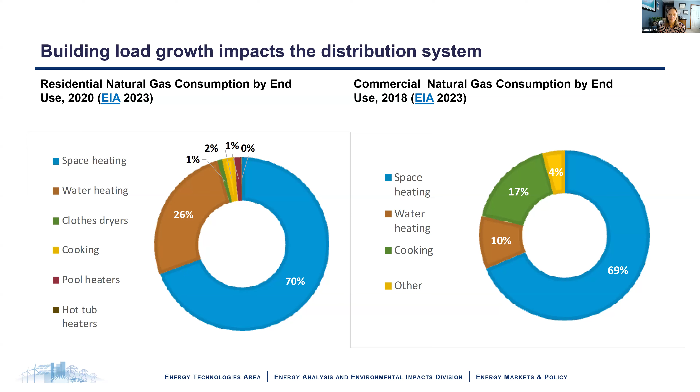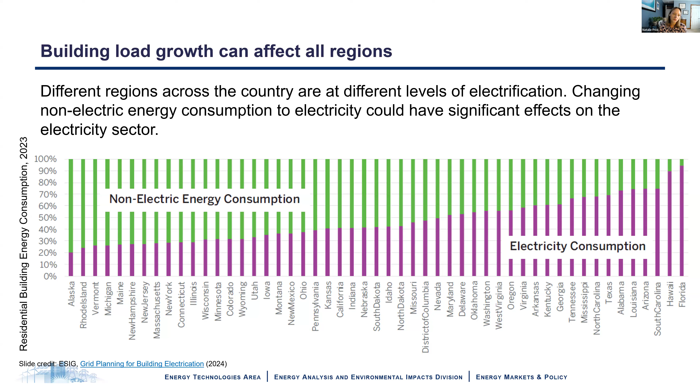Areas that are already electrified can be more efficient. So even though Texas has a lot of electric heat on their grid already, they could be more efficient, which I'll talk about in the second portion of my presentation. On the other end of the spectrum, New England states like Vermont and Rhode Island have a lot of delivered fuels for heating sources, so the impact of load growth from buildings due to electrification are going to be a lot more significant.

So the impacts of load growth are not going to be uniform across the electricity system. There's going to be pockets of it, and they're going to occur at different times of the day and year, depending on what the load growth is coming from.

For example, on the left side of the slide, this is the number of dwelling units with electric heat in Massachusetts, from an ESIG report on building electrification. This shows where load growth from building electrification would potentially be higher, in areas with more orange or more blue versus areas with less. So it's just not going to be uniform across the state, and it needs more thoughtful planning as we move forward.

On the right side of the slide is a commercial energy efficiency potential assessment from PacifiCorp's 2025 IRP. It shows different types of buildings contributing to load growth, and that load growth in buildings isn't just from switching delivered fuels or natural gas to electric heating.

It's also from different types of load growth, and it's going to occur at different times of day, even if it is for heating. For example, small office buildings will have a different saturation of electric space and water heating than a warehouse will. This means the solutions for these challenges are going to be different too, because building types differ, the way people operate in them differs, and usage schedules are different. So there are lots of opportunities to overcome this, and they're not going to be the same across the board.

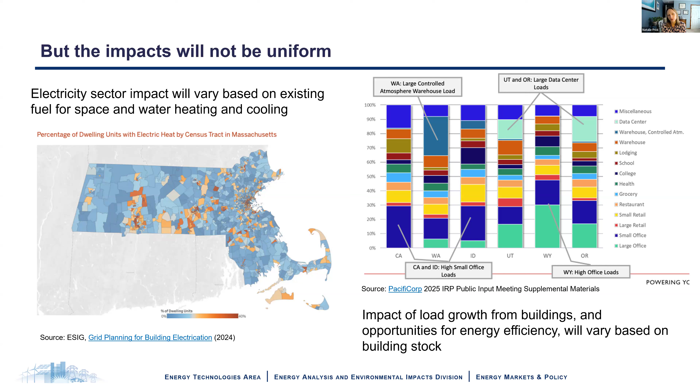So we can go on to the next slide.

I'm going to talk about a couple of the challenges with incorporating building load growth impacts into distribution system planning. These are all featured in the ESIG report linked at the bottom of this slide.

First, changing weather patterns are hard to plan for. This is particularly important as we move to electric heat, because heat pumps operate differently in extreme cold, specifically in a non-linear way. Use of heat pumps during longer and more severe winter events is going to change the shape of demand on the electricity system, and it's going to stress the system differently than when more customers are on delivered fuel or natural gas for heating.

The second thing is that electrification is happening regardless of whether policymakers want it—it's something people are choosing to do. This chart on the top left is from RMI, showing sales of heat pumps compared to gas furnaces from July 2022 to April of 2024. The blue line is heat pump sales, the orange line is gas furnace sales, and as you can see, heat pumps have been outselling gas furnaces for more than two years.

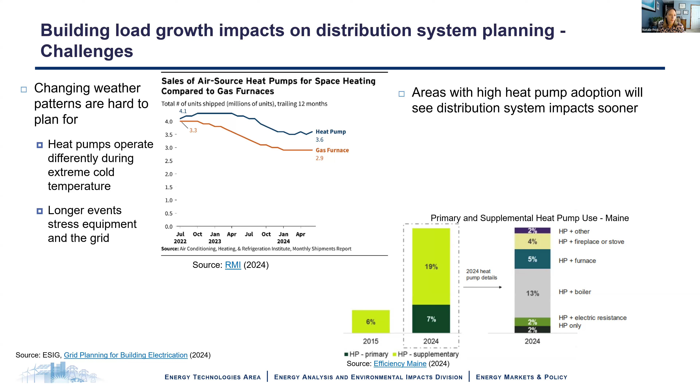I'm going to talk about some strategies to overcome those challenges. So we can go on to the next one.

Thanks. So the first strategy is improving load forecasting. Planners can expand the forecast horizon and broaden the factors being considered. Individual electrification projects may be implemented quickly, but the long lifetime of space heating and water heating equipment means the impacts of electrification are going to occur over many years.

And then when you add in the impacts of different weather—such as if people are converting from gas heat to electric heat, and at the same time you have maybe a couple of years of mild winters—it might mask the effect of the load growth on the electricity system.

Using load forecasts that capture building electrification should look beyond the typical 3 to 5 years that's considered in distribution system planning. Moving beyond that shorter time frame could be important.

Another factor is looking beyond recent trends to develop the forecast. This figure shows how historical trends and known projects make up the majority of inputs into short-term forecasts. But physics-based modeling, which simulates how power demand would change given changes to the energy-related characteristics of individual buildings, and adoption forecasts make up a larger percentage of the input factors as we look further into the future.

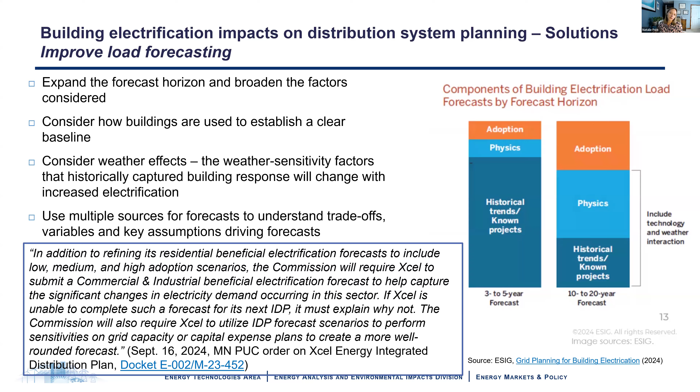We can go on to the next slide. I apologize for my distraction, I have a new dog who only acts very badly when I'm doing meetings.

Another strategy is to modernize planning approaches. Planners can reconsider some core planning assumptions, such as design conditions, like how hot or how cold it's going to be outside.

You can think about thresholds, for example how much loading a feeder the utility is comfortable with. We can consider headroom, such as understanding what an appropriate planning margin is, and also load diversity, meaning not all load is going to show up at the same time on the same day.

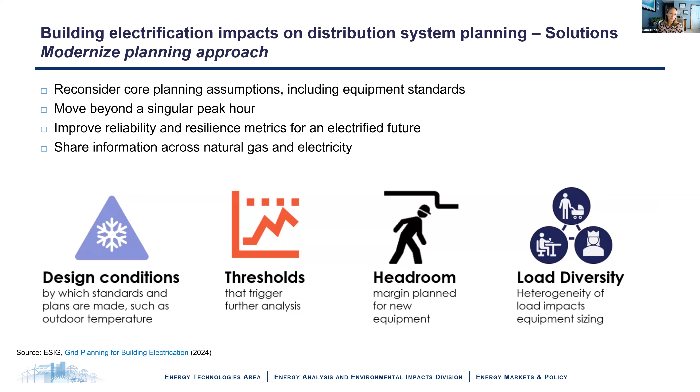In addition, planners can move beyond a single peak hour and gain a better understanding of distribution system impacts. This doesn't have to automatically mean going to an 8760 — it could just be adding representative or extreme days. I'll talk about these last two bullets in the next slide.

Planners can consider how to improve reliability and resilience metrics in distribution system planning, such as how we measure success given changing risk, and whether there are other metrics we should be considering — for example, how do we consider the impact of outages on distribution system reliability from a quality of service and human health impact?

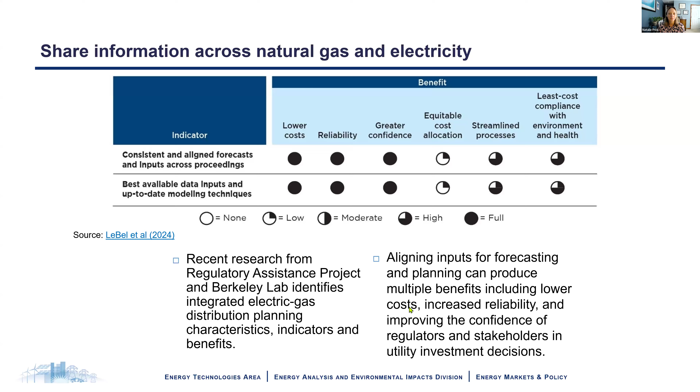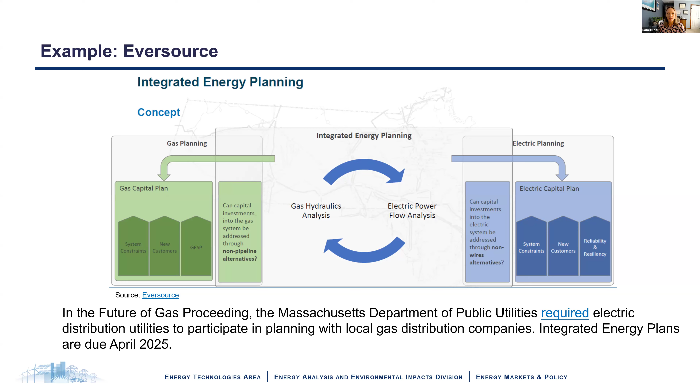I'm going to wrap up my presentation talking about strategies to reduce the impacts of load growth from buildings and electrification on the distribution system.

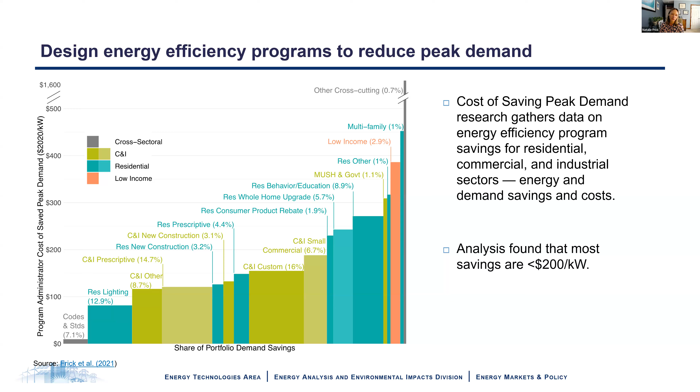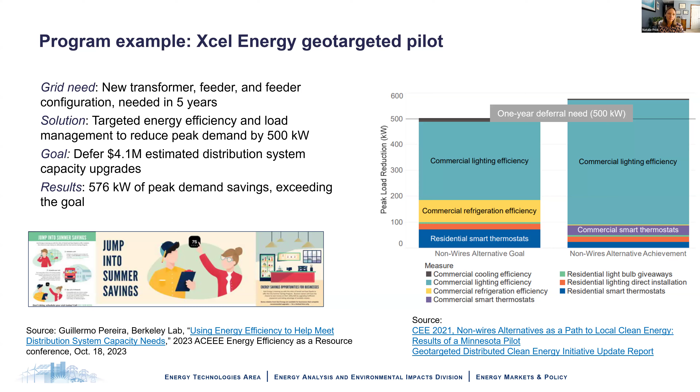For Wi-Fi thermostat programs, which are a very common program across the United States, they generally have both upfront and retention incentives. The upfront incentives being offered are typically around $100 per enrolled device. So there's lots of opportunities to develop these programs and build on lessons learned from other utilities already.

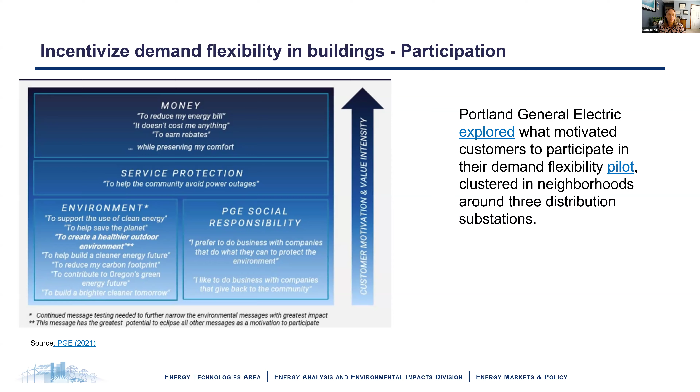Another thing that states can consider is targeted electrification, which can reduce the cost of building load growth on the distribution system. Targeted electrification strategically decommissions portions of the natural gas system at a specific geographic location.

There's also some examples from Colorado. They have a manufactured home targeted electrification project that is in its first year of winter operation right now. And then also in Massachusetts, the regulators are requiring the local gas distribution companies to deploy targeted electrification pilots, and those proposals have to be filed by next year.

In addition, there are 8 states that have enacted legislation that promote thermal energy networks, which are neighborhood scale shared networks of water pipes that can transfer heating in and out of buildings.

We can go on to the next slide. I believe this is my last one, so I'll pause and see if there's questions after this, and then I will hand it over to Andy.

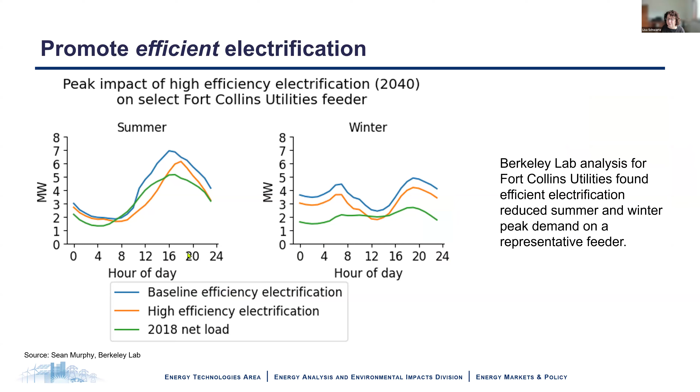Miles, I was talking with Miles about a question. I was curious about the slide 11 on the resilience and reliability metrics, which is a topic that Miles and I have been working on. We just released a report on that topic, and you put a link in the chat box.

We also have a request to show your dog. So first of all, we should do that. It is the cutest dog, a little naughty, but like 5.5 months old, laying down and being so calm and chill now that I'm done presenting, but he ate a plant and ate the trash while I was presenting. So I apologize for my distractions, but I'm gonna show him because I love doing it.

It's a big dog, look at that. His name is Ziggy. He's a retriever pit bull mix, and he's 5 months old and kind of a pain. But anyway, I apologize for all of my distractions. Yeah, Ziggy Stardust, truly a star.

I did have a few thoughts. Berkeley Lab has an ICE calculator tool that measures customer interruption costs using a collection of customer interruption cost surveys, and it will be interesting to see as we do an update of the tool with new survey data what the impacts to the cost of customer interruptions are as more electrification occurs, and they may have larger impacts on customers, whether customers are reporting in those surveys that interruptions, or they're willing to pay more to avoid an interruption, and thus investments in resilience to extreme weather may actually grow higher and higher, and we may be more willing to do that.

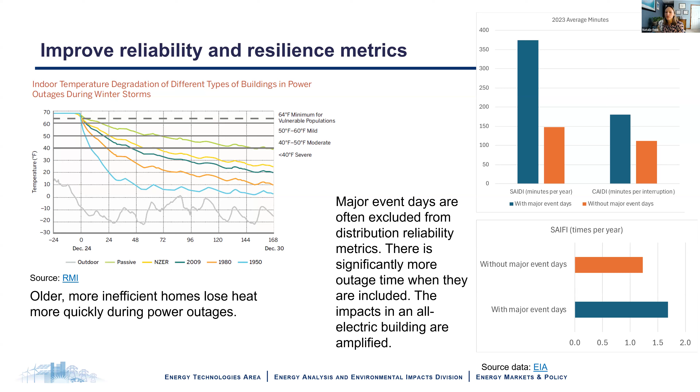It's the slide about the different ways that they looked at what motivated consumers. And so you remember the smart grid testbed had like, I don't know, it was per very high KW or something. And I don't have it listed on the slide, but...

It was based—they were offering customers this incentive and then also offering them other options for how they could use their savings. They could donate it to a charity. They asked a lot of questions about what motivated people to participate and what they wanted to do with the savings that they were acquiring. And it was in geographic locations that were part of more or less a non-wires alternative project.

And so let me see if I answered the question. Three substations, with different composition of customers. And this was truly a pilot where they were actually accruing savings to put off any potential expensive upgrades on a substation. At the same time, like Natalie said, they're also trying to understand for the future, what's the motivating factor? Is it money? Is it helping the community? Is it reducing reliability issues? So it's a really interesting pilot, but it was a very high per kilowatt hour number for savings.

I can put a link in the chat later to a better resource for that. Anything else before we go to Andy?

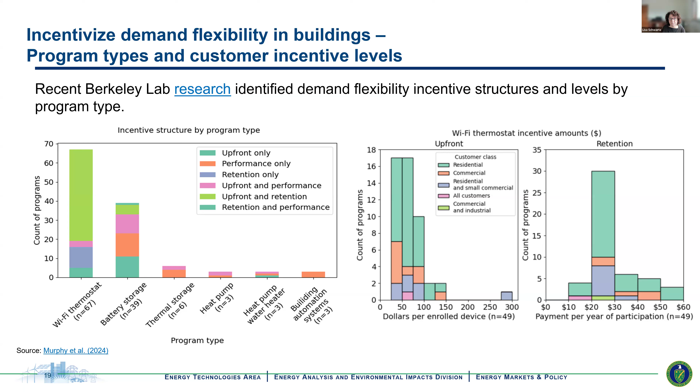I'm going to pick up a little bit where Natalie left off and talk more specifically about the value of efficiency and demand flexibility in future grids with load growth, especially in the building sector. Then I'll tie some of that into a discussion about how that value flows into customer bills and rate design around building technology electrification.

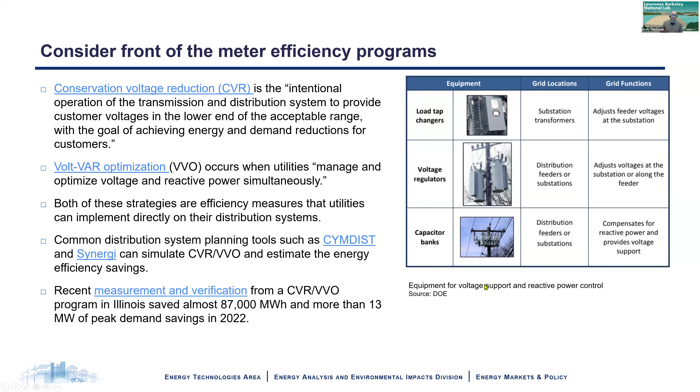I want to talk about the bulk power system for a moment, because it's a good launching point when we start to put numbers to the value of efficiency and demand flexibility. This comes from a study we did a little over a year ago, looking at the costs to the bulk power system: new generation and transmission capacity, fuel, and variable operations and maintenance expenses on the grid, and what those costs look like in futures with varying levels of load growth from the building sector, particularly through electrification technology.

As a starting place, we found that very inefficient electrification—think electric resistance space and water heating—added a pretty significant load to the grid. As a result, the modeling showed we needed to build a lot of new generation supply, requiring high capital costs and transmission investment. A lot of this is also about what the grid of the future looks like, especially with this inefficient electrification.

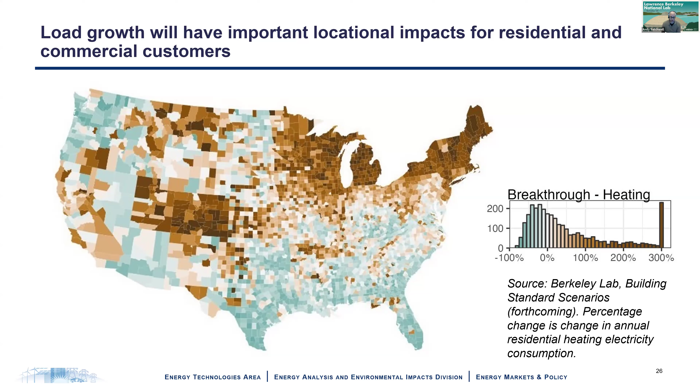So go to the next slide—what's the role of efficiency and flexibility? Going back to that bulk power system study, two examples highlight the opportunities to use efficiency and flexibility to help mitigate some of the impacts I was talking about.

The first example is Texas, modeled in 2050, looking at a summer peak day—a summer peaking system. We find that using heat pumps, which have a higher energy conversion rate and are thus more energy efficient than electric resistance heating and cooling options, can generally reduce the peak impacts from new demand load growth compared to inefficient electrification.

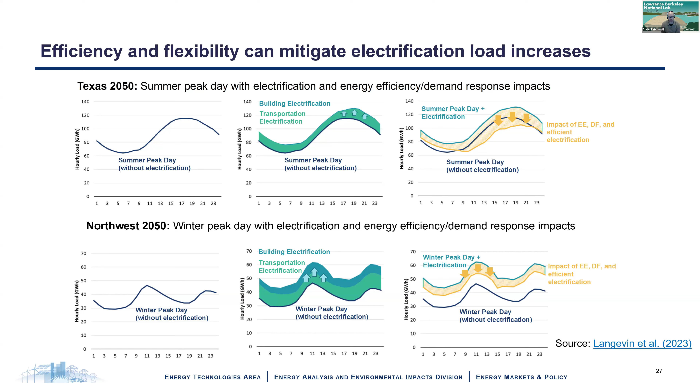So we shift that curve down in the summer. In the Northwest, an example of inefficient electrification with a lot of electric resistance heating and water heating, you get pretty significant peaks in the winter. What happens is you can reduce that peak significantly through heat pump deployment as well as demand flexibility, things like thermostat control programs that reduce set point temperatures, and other strategies like shifting broader loads in the residential home. So you can affect these peaks simply through using more efficient heat pumps as well as implementing demand flexibility strategies.

So what does this mean on a dollar basis? Going back to those staggering increases in bulk power system costs, when you assume more efficient heat pump deployment and greater demand flexibility, you can reduce these fixed and variable power system costs by a significant amount. With the most aggressive deployment of renewable supply combined with efficient electrification building technologies, you can reduce almost a third of those costs, a little over $100 billion a year, simply through efficiency and demand flexibility. This is particularly true for power systems with more aggressive load growth and state goals related to renewable and clean energy sources, because those are so capital cost intensive.

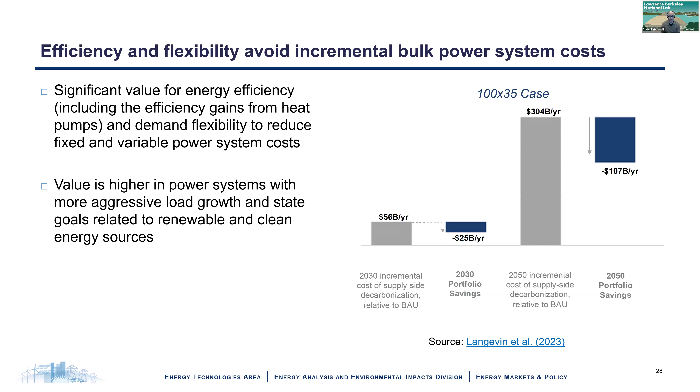So what you can take away from these results is that winter peaks are particularly important when we talk about load growth in the building sector from electrification. Also think about the value of efficiency and flexibility in systems that are pretty constrained, that can't transport electricity and share it across large areas. So there's a significant opportunity there as well.

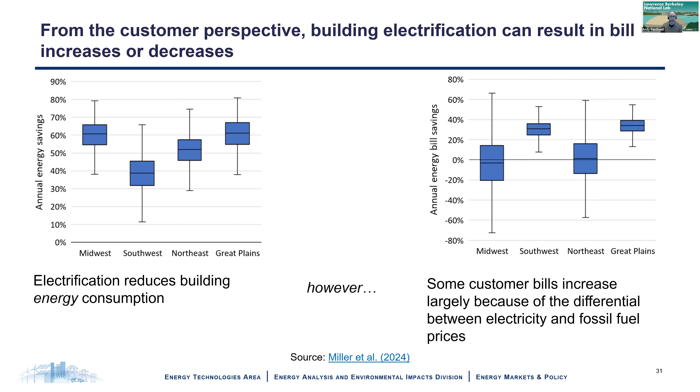So this is the launching point to think about how we can possibly mitigate these bill impacts, thinking about it through retail electricity rates. Let's go to the next slide.

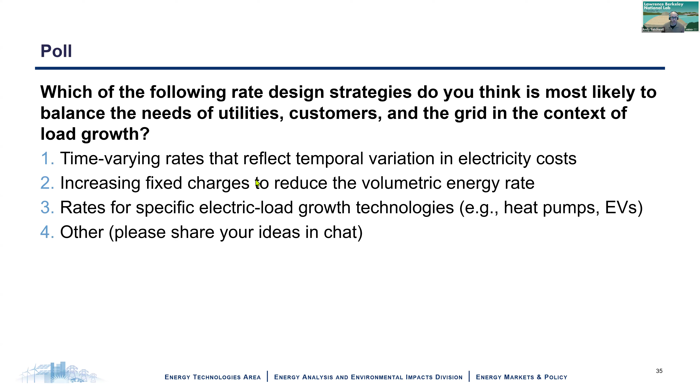So with that, let's go to the next slide, which I think is actually my last slide. These are just some concluding thoughts here about customer bills, and how what drives customer bills, as I've talked about so far, may have implications for how you design and implement building electrification programs. I think it's a no-brainer: buildings in locations with low electricity rates, electrification makes a lot of sense.

And we tend to see that as well just in practice, in the Southeast that tends to have low electricity rates and homes with a lot of underlying electric resistance technologies, there's a lot of heat pump deployment, for example. And certainly targeting marketing to customers with those electric resistance technologies can be pretty straightforward, because those are the customers who are more likely to experience bill savings and favorable payback times on their investments.

But it is those customers with fossil fuel baseline technologies, like natural gas heating or water heating, that may need some additional education, or customers without pre-existing space cooling. So when you install a heat pump, you get air conditioning, which is great for comfort, but it also adds a new load for customers, which can increase their bills. And so educating those customers in particular about the potential financial costs, but also the health and comfort benefits of electrification, can be a possible design and implementation consideration.

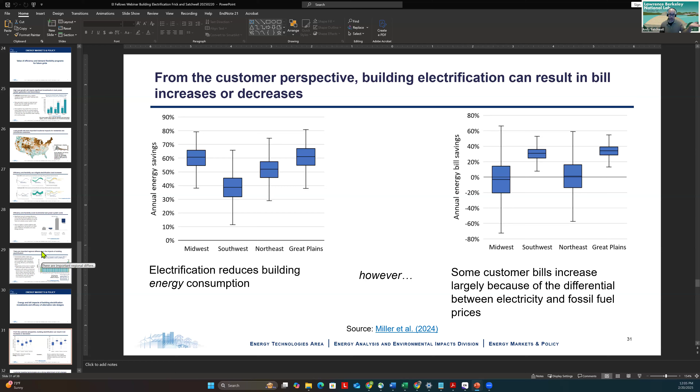Yeah, no, it's a great question, Nate. Specifically in the study, our Northeast utility that we were modeling had very high fuel oil, as I'm sure you're aware, and a little bit of propane in the underlying fuel mix. I think utilities, from the customer perspective, certainly it's customers that have a fossil fuel—whether natural gas, fuel oil, or propane—as the existing baseline technology. I do think other utilities should also be aware of these issues, because they're going to switch from summer to winter peaks, or at least the winter peaks are going to be noticeable and need to be thought about from an operational perspective. And that is happening even outside places that have a large amount of fossil-based heating to begin with.

And so I think those are kind of the two pieces of it, but certainly the utilities with a lot of fossil fuel baseline technology are the ones that I think are going to need to consider the customer education component in program design and implementation, and think through some additional programs and incentives beyond just retail rate design. I don't know if rate design will get us far enough to make the economics make sense for a lot of customers there.

Thanks, Andy, I appreciate that. Yeah, and Nate, after this I'll put some links in the chat to the dual fuel heat pump rate programs for load flexibility that I found. Great, thank you. I think I've read the Otter Tail one, is that what it is? I haven't seen the other one, so that'd be great.

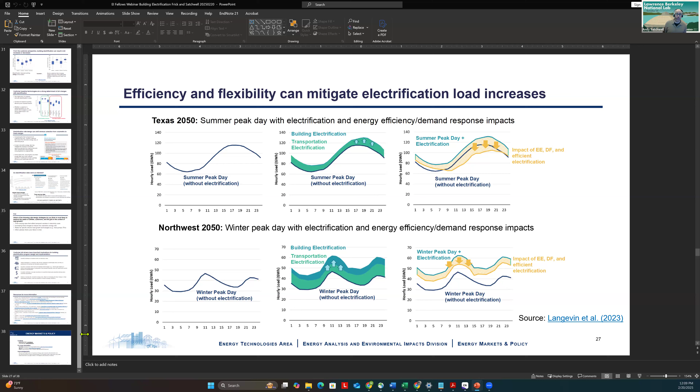Yeah, boy, we could probably go for hours talking about this question. There's some good literature out there on low income customer response to time varying rates. I'll put a link to one meta study we did here at the lab in the chat shortly. Some of it's very empirical and some of it's very anecdotal. I asked the question: are there technologies that can help customers respond regardless of their structural situation, whether they're working multiple jobs, their tendency to be home or not, or their home building setup? Smart thermostats are available, inexpensive, you can program them. There are other technologies, Amazon Home or the Alexa stuff. There are ways to use inexpensive technologies to help control usage even during peak periods. So it's a great question, not fully settled for sure.

Tamara, do you know if electrification for buildings was much of the discussion? I think that's a piece of it, because there is beneficial electrification the utilities have to be doing as well. And so they found that because of the cold climate, like what was mentioned before with gas prices versus electric prices, when you switch a household to a heat pump it often raises their bills, which is another equity concern in terms of those customers being left on the gas system.

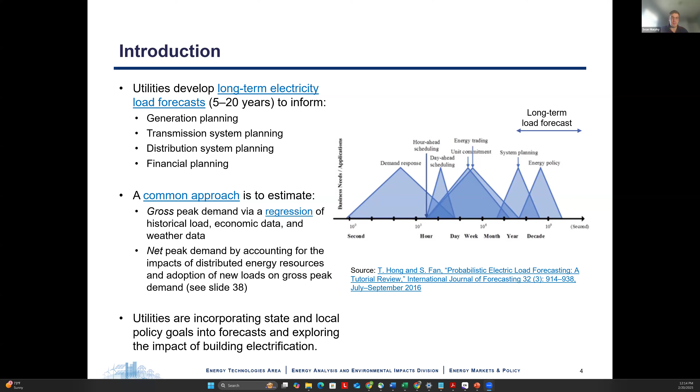The framework that we developed responds to this interest in building electrification. So for each step in the framework, we provide some guiding questions and identify key modeling decisions and considerations, and provide examples from technical assistance that we provided to 2 municipal utilities: the Sacramento Municipal Utility District, or SMUD, which is in Northern California, and Fort Collins Utilities in Colorado.

It's important to note that our approach is not the only way to develop a load forecast that accounts for building electrification. It reflects the lessons learned from our technical assistance and the data that we had available, and in particular focuses on how to use these publicly available end-use load shapes and load forecasts.

I'll get into that in a little bit because there's a data resource out there that we leverage for this that can be really useful for your purposes, and for any utility that's developing a load forecast, that I want to increase your awareness of. Next slide.

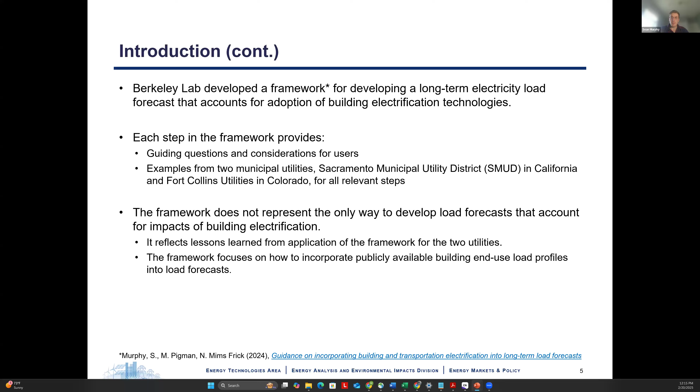Next, the framework shows how to choose key inputs on technology selection and adoption before making the actual estimates of the changes in load due to building electrification. And finally, the framework provides examples of how to apply the forecast and actually analyze different planning problems that you might be facing.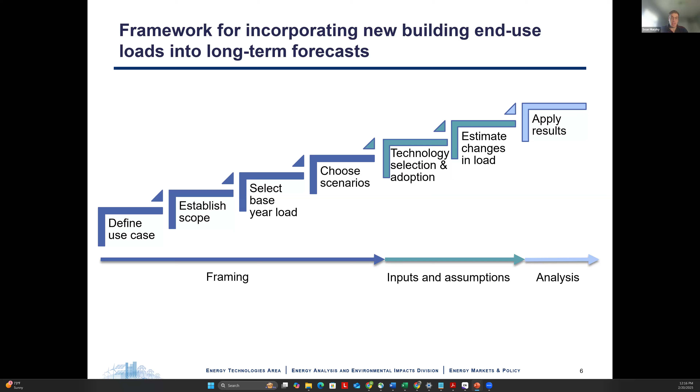Next slide, you can move to the next one. I'll now be walking through each of the framework steps and providing some examples. So the first is defining the use case.

It's important to ask at the onset what planning activities you're trying to inform, be it generation, transmission, distribution, or financial planning. The decisions made on the forecast scope, and the scenarios and analyses that you conduct with the forecast, are all downstream of this decision on what the use case is.

So in the next slide, I'll provide some examples of how we addressed this with our collaborating utilities.

The utilities we provided technical assistance to had some different goals in mind. Fort Collins Utilities was interested in the impacts of building electrification on its distribution system, and in particular, whether their feeders may require some upgrades. If you're adding a lot more load, that can put some strain on the physical distribution system and may require some upgrades.

They're also interested in understanding how energy efficiency may be able to mitigate those impacts. SMUD, on the other hand, was interested in the system-wide impacts of building electrification to inform their integrated resource planning process, as well as efficiency program design. So slight differences in the focus here. Fort Collins is more on the distribution system, and SMUD was system-wide, and that had some impacts on the decisions that we made in the next steps of the forecast.

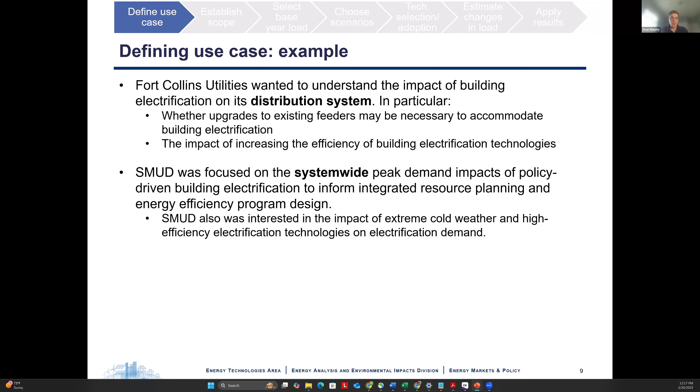Once a use case is defined, the next step is to establish the scope of the forecast in terms of the physical part of the power system that you're concerned with, the customer segments that are relevant - so that's residential versus commercial and industrial - and then the time frame that you're concerned with. Each of these should be consistent with the use case and internally consistent. If you're focused on residential feeders, then you don't need to think as much about industrial load growth.

As I mentioned earlier, long-term load forecasts can be from 5 to 20 years. The further out in time, the more uncertainty there is, but understanding what might happen in 20 years can be really important for decisions in the near term. The lead time for getting a new substation may be 5 years, so it's useful to know if you're going to need one, say, even in 10.

To select a time frame, some things to consider include what policies you're trying to account for, whether there is a requirement to analyze load over a particular time frame due to statutory requirements, and whether you're looking out far enough to see the expected market-based or policy-based impacts of electrification. So if you're expecting a lot of adoption of EVs in 10 years, your 5-year forecast isn't going to shine a lot of light on the issues you're trying to solve. It's helpful to have a time frame that includes the periods in which you think these changes are going to occur.

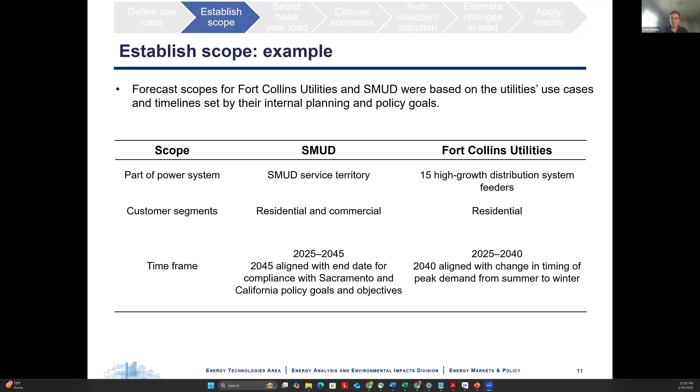I'd mentioned this term earlier of a base year load. Often utilities use that regression approach, looking at historical weather, economic, and load data, using that to understand how peak demand depends on the economy and weather, and then extrapolating that into the future. That's a pretty common way to set a foundation for your forecast and then make adjustments from there.

We ended up taking a slightly different approach that had to do with the data we had access to, and we were really interested in understanding what an hourly load forecast would look like. So we wanted to do more than just the single hour of peak demand. What we looked for was we started with an entire year's worth of load from the utility. We took the meter data from the utility and said that this is the foundation for our forecast, and then built on top of that in terms of adding the electrified loads.

There are different ways you could go about that. If you have a single year of load, that's going to carry with it the specific weather, economic, and events that occurred in that year. If you took multiple years of load and averaged them out, things average out a bit. And then you can also have an econometric way of estimating load by taking all these different variables and trying to project a relationship out in time.

One of the key inputs here is that we needed access to 15-minute or hourly gross metering data, and also having the PV generation data is really helpful, because sometimes if you just have the net load shape from a utility, you need to add back the PV generation to understand what demand was at the building level.

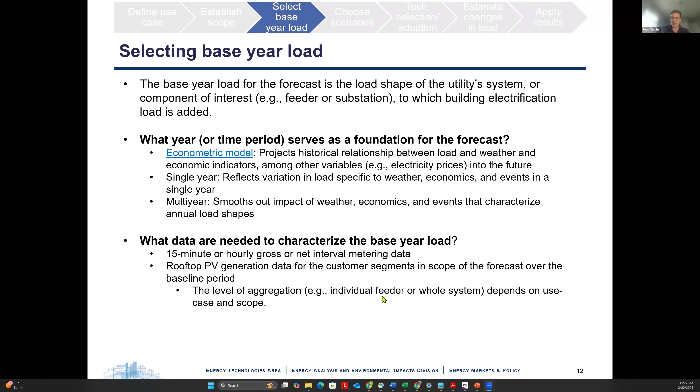So as I mentioned, we had to make some decisions based on the data that we had. I'll be talking about this database of end-use load profiles—basically, what does an hourly load shape for a heat pump electric water heater look like? There's a database we use to provide those for our forecasting, and those were all based in 2018.

We had to use 2018 load as our foundation when we worked for both SMUD and Fort Collins. For SMUD, we aggregated everything by customer class, because we knew there were differences between residential and commercial customers when it came to electrification. For Fort Collins, we aggregated customer-level load at the level of 15 different feeders, so we had 15 different load shapes, meaning 15 different forecasts.

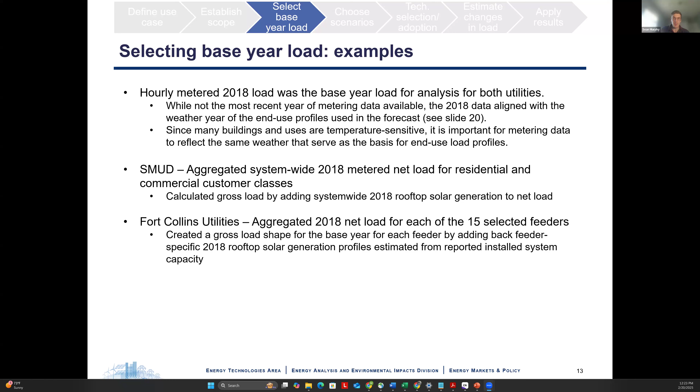Next slide. So, choosing scenarios. In any aspect of utility planning, scenarios help you explore a range of possible futures and get a handle on the range of outcomes that could occur from different drivers of uncertainty.

You can't explore everything with every possible scenario, or understand the load forecast under every condition that could happen in the next 20 years. So selecting scenarios is important for setting bounds on the complexity of your analysis, so you're building scenarios around the key things you think will affect building electrification.

In particular, you can select scenarios on building electrification related to technology adoption levels—say, what share of homes do you expect to have heat pumps in 2030 versus 2040. Then there's technology operations, which can include the efficiency of the technology, since whether you're installing an electric resistance water heater or a heat pump water heater can have a big impact on the load you'd expect in a forecast.

To construct these scenarios, you consider different policies affecting building electrification, as well as expected market changes that affect adoption. You can relate scenarios to the end date of a policy and work backwards: if everyone has to start buying a heat pump water heater by 2035, what does that mean for adoption in the following years?

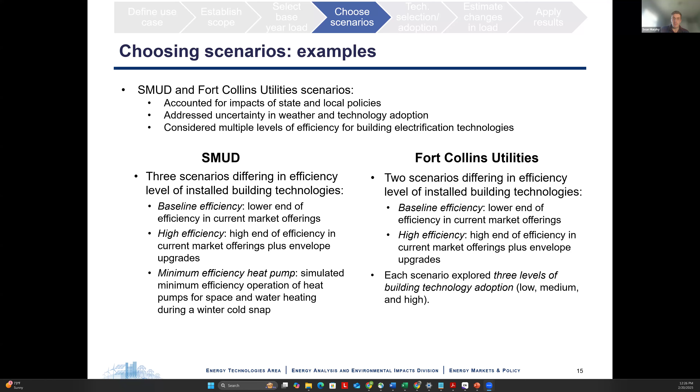Next is the selection of technologies to include in the forecast. You can think of this in two steps: first, what are the end uses—water heating, space heating, cooking—that you expect to electrify? Then, what are the particular technologies you'd select?

So if you're expecting space and water heating, it's important to include those. But if you're not expecting a lot of people to electrify their dryers, you may not include that in the forecast.

When it comes to technology selection, you make decisions between, say, an electric resistance water heater and a heat pump water heater, since those can have significant impacts. Again, you can align these decisions with existing policies. Building codes may set a minimum efficiency level, but you also may need to make judgment calls on what you expect people to adopt in the future. For example, do you expect people to fully electrify space heating even in a cold region, or do you expect them to retain gas or oil heat in the Northeast, with the heat pump just as a supplementary heat source? Those decisions can have a big impact on peak demand estimates and are important to be explicit about in developing your forecast assumptions.

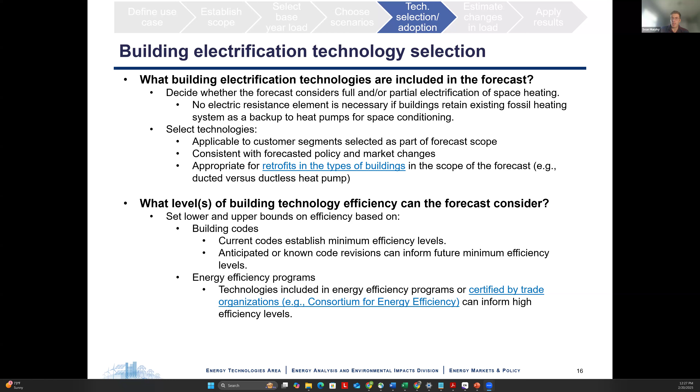The decisions you can make in selecting these technologies include the different SEER or HSPF ratings, which are efficiency metrics for heat pumps, and the different levels or locations of envelope insulation in the building. All of these things can impact the loads, and this is the level of granularity you can get to in developing assumptions on technology selection for load forecasts.

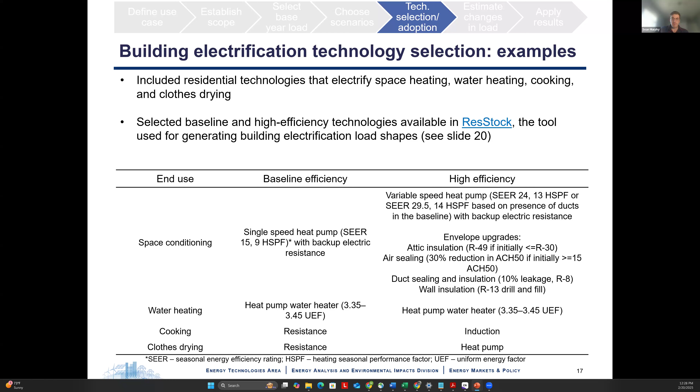The next thing I want to talk about is selecting the level of technology adoption in different years of the forecast. It's really important to first know what the current level of adoption is—do you have any heat pumps in your area? Then you can determine what's driving adoption and estimate how it changes over time. Policies and consumer preferences may be the drivers here. You'll never have perfect foresight, but you can make informed assessments by considering what adoption is compliant with relevant policies and trying to understand the market dynamics and how people are starting to adopt these things.

You might be able to leverage existing estimates of technology adoption—there are researchers who've made efforts on this, and we have some resources at the end of this presentation linking to those. Alternatively, you can try to model tech adoption using different stock turnover or diffusion models; we provide links there as well. There are existing methods for estimating adoption over time that you could leverage in a more bottom-up way, similar to what utilities might use in their forecasts.

We'll also add that knowing adoption at a utility-wide or state level is useful for a forecast, but we expect adoption of electrification technologies to vary geographically. Some people are more likely to adopt than others, and some are more able to adopt these technologies than others. There are methods to relate socioeconomic factors of adoption and use those to understand which pockets of a utility's jurisdiction may be more likely to have heat pumps in the short run.

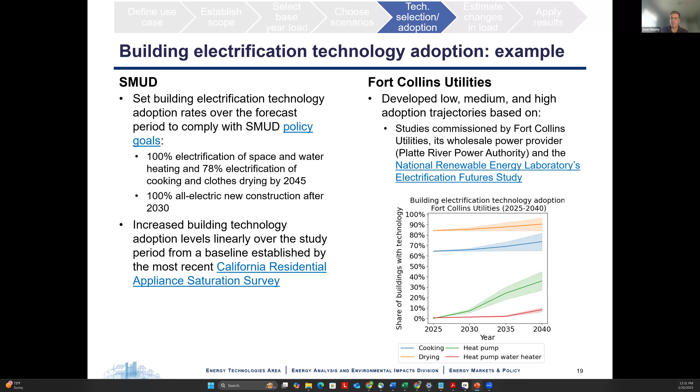So far we've covered selecting the technologies and their adoption over time. Now I want to talk about how these two things come together to produce estimates of building electrification. At a high level, imagine you have a load shape for a heat pump, and you want to scale that up—if everyone in an area adopts them, you can just multiply those two together. But in reality, not all buildings are the same, and people don't always use technologies at the same times and intensities. So a forecast that assumes a single prototypical heat pump or electric dryer isn't really reflecting the variation we know exists.

We address this challenge by using models called ResStock and ComStock, developed by the National Renewable Energy Lab. They provide end-use load profiles for representative buildings of the US building stock, both as they were and what we expect them to be under electrification. These are really powerful tools we've used across a number of our projects, and they've been used by utilities in their load forecasts, since you can directly download and incorporate them into your processes.

There's a lot of detail on all of this, and I'm not going to go into all of it. We do have a companion report for anyone interested in the nitty gritty. So for now, I'll move on to the next step, once you have those load profiles.

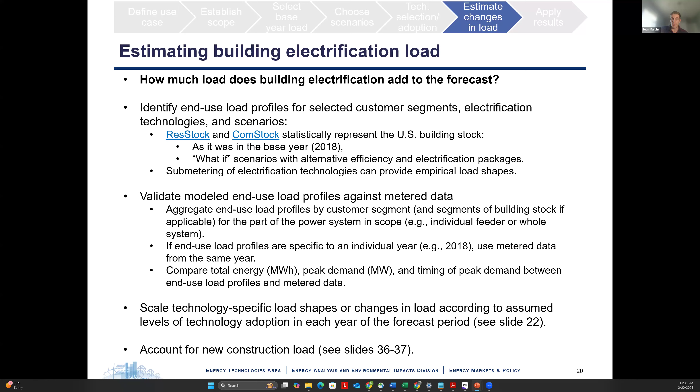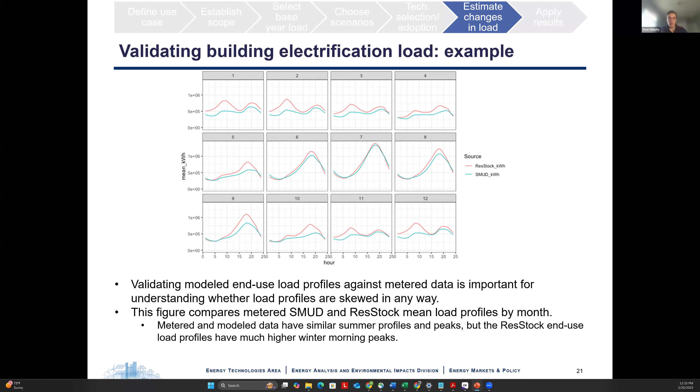Once you have those load profiles, the first thing you want to do is check how closely they align—how well they represent demand as we know it. So we compared the modeled load from ResStock, shown in orange, to the actual meter demand in SMUD's territory, shown in green, to see how well it represents reality. What we find is that it's pretty good at representing demand in the summer, seen in section 7, but in other parts of the year it's not as accurate. So we had to adapt and find a way of using these that didn't carry some of these biases.

The way we approached this was by taking the end-use load profile models for the baseline condition—what buildings in America look like right now—and what they'll look like once electrified, then calculating the difference between them, and using that difference in the forecast rather than the direct output from modeling. This is one of the most methodologically dense parts of our project, so I won't go into the depths of it, but it's important to interrogate the data sources you're using and understand whether these building load models reflect building load in the areas where you live.

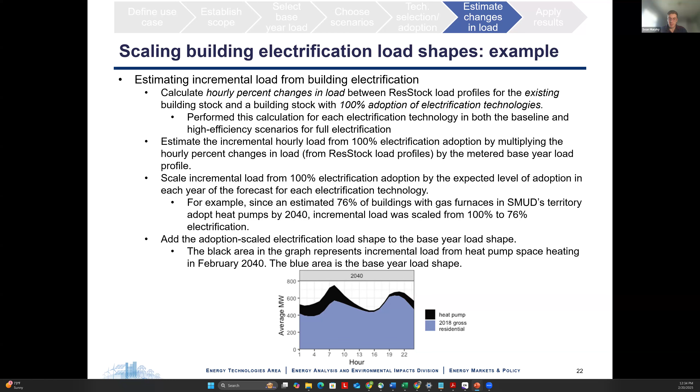This is the last section of the presentation, where we show how we applied some of the results of our forecast. This is the most interesting part, because at this point we've made all the methodological decisions about how you build a forecast—now we get to apply it to the planning questions we're concerned with.

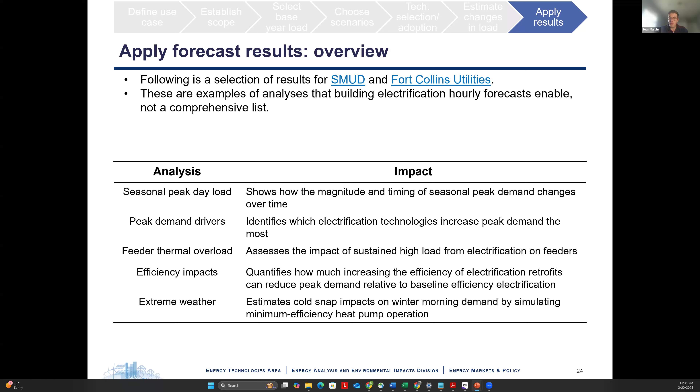When we do this, we're able to understand a couple of really interesting things. First, we can see how the magnitude of peak demand changes over time with our forecast. Then we can also see how the timing of peak demand changes.

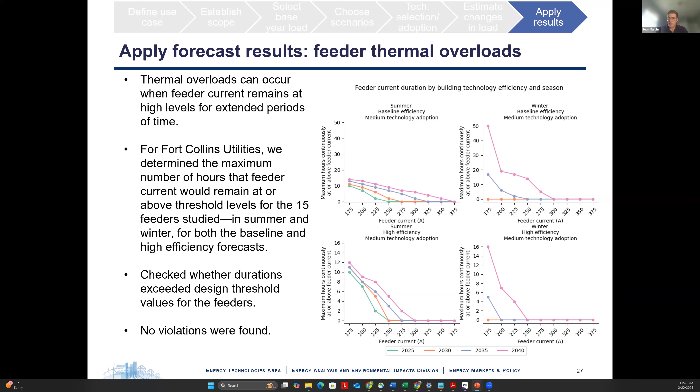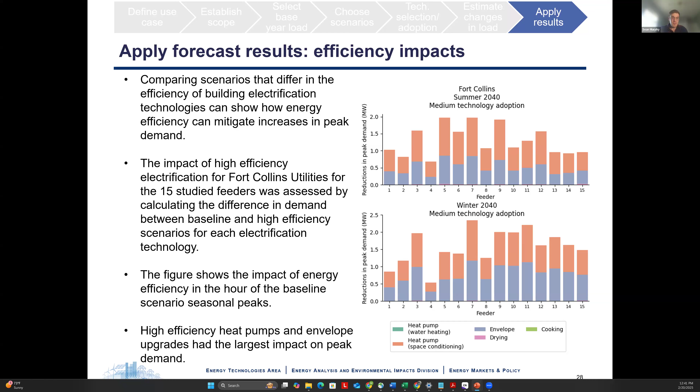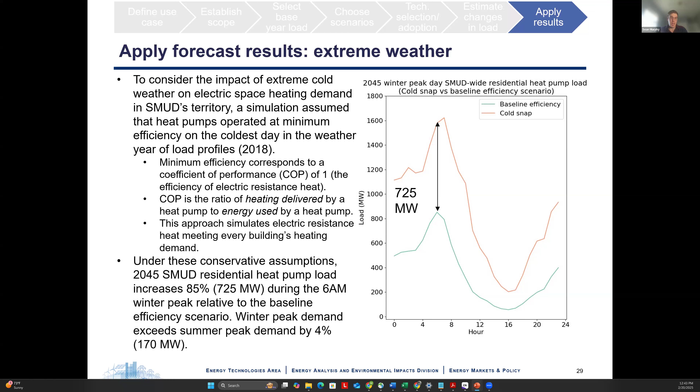So I have one more slide with some key takeaways before we move to Q&A. Long-term electricity load forecasts are foundational to a number of different utility practices. Forecast scenarios can explore uncertainty in building electrification technology and efficiency levels. Utilities can use publicly available end-use load profiles to account for the impacts of building electrification in long-term load forecasts. And last, utilities can apply these forecasts to address a number of different planning questions related to electrification, peak demand drivers, understanding feeder thermal overload risk, and the peak demand impacts of extreme weather.

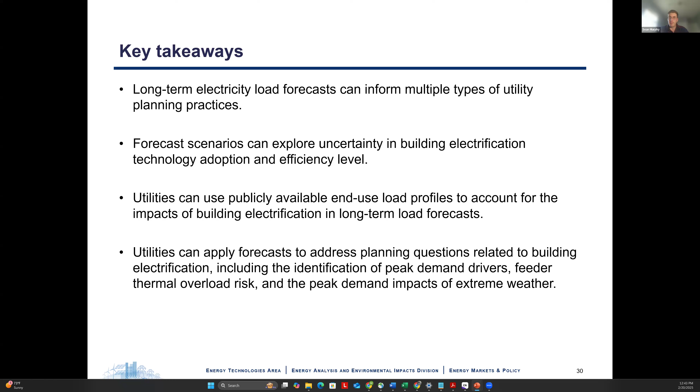Thanks, Sean. Does anybody have any questions? I don't see any in the chat box right at the moment. They were still on the last time varying rates topic, which is great - we'd like to talk about that. Any questions for Sean about the two utility studies he worked on with respect to electrification and efficiency of electrification technologies?

Sean, I have a question. Can you tell me what SMUD and Fort Collins utilities did with the results of your studies? How did that help inform their planning?

That's a good question. I think for both, sometimes we were an external voice - it provided an external voice and assessment for more internal conversations, I think is the connective thread. They both have some, right? SMUD has its own forecasts, and it was helpful to have us come in and provide an independent assessment of what they thought would happen. So I think they compared our results to theirs and used that as part of their broader decision-making processes or risk assessment processes.